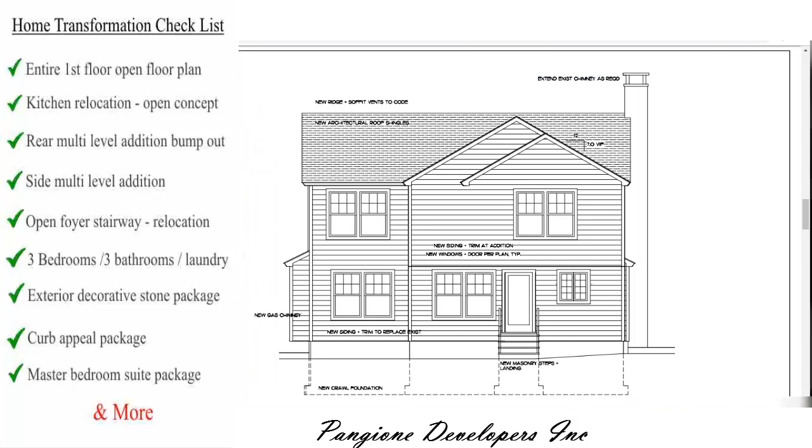Let's go in there and take a look at some of the files that we have here. So again, this is looking down at the survey, provided by the homeowner, and you can see here's the existing house right here, here's the sidewalk.

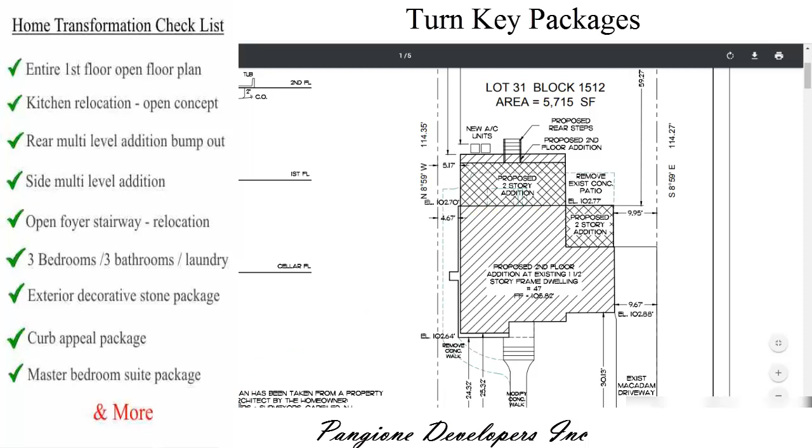So what's happening is this is the existing house, and then we're adding a two-story addition behind the room that's over here, and another addition behind the main portion of the house. And just to give you another idea of what that looks like, here it is right here. We're going above this area right here, and above this whole top floor.

So let's jump back into the files and I'll show you the floor plans. Now here is the second floor plan. You have a bedroom over here, another bedroom, and the third bedroom. This is the master suite. All new windows. You have a laundry up here, and it's going to be a beautiful open staircase.

So you're going to have this left corner here. You'll come in through the front door, which I'll show you on the first floor, and then enter and go up this U-shaped staircase, which leads you up to the top floor hallway. You have your hall bathroom right here, and then the hall takes you into bedroom 1, 2, and then at this area right here is the entry, and this whole section is all master suite.

You have your master bathroom, double sink toilet, and an oversized custom shower. Beautiful master bedroom with a tray ceiling and a very large walk-in closet.

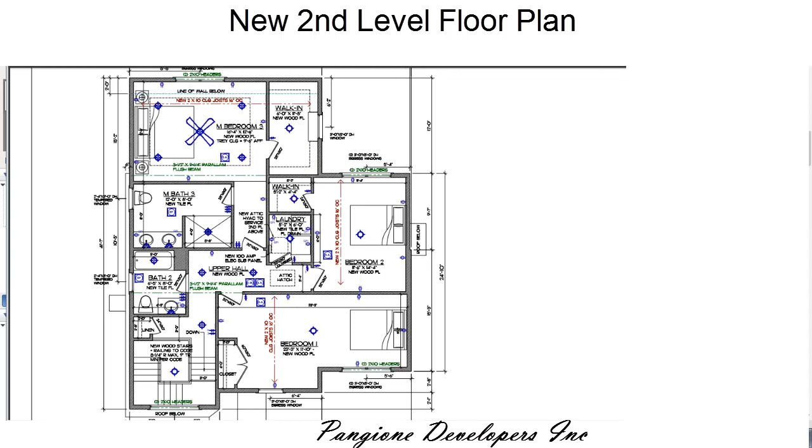Now let's take a look at the first floor, and as you recall, here is the area walking up to the second floor, and here is our first floor. You walk in through the front door. We're going to be changing all these windows. This is the addition over here, this whole back section is an addition.

And then we're going to be stripping down this whole existing area over here. You can see the header marks. We're going to have some structural beams in there that will allow this ceiling to be one level all the way through. It really looks nice. You can see all the recessed lighting that we're going to be installing.

Just to give you a quick walkthrough: as you walk in the front door, it's going to be completely open front to back. Foyer, family room, dining room, kitchen, everything is open. When you come in, you'll see the open foyer leading up to the second floor. We have a coat closet, and past this first archway, on the right is a nice open office with French doors looking in, then the existing bathroom we're remodeling, and then it all opens up to the kitchen. We're going to have an oversized pantry wrapped with countertops, cabinets, and a nice island, and on this side will be the dining area, looking into a completely open family room with a gas fireplace.

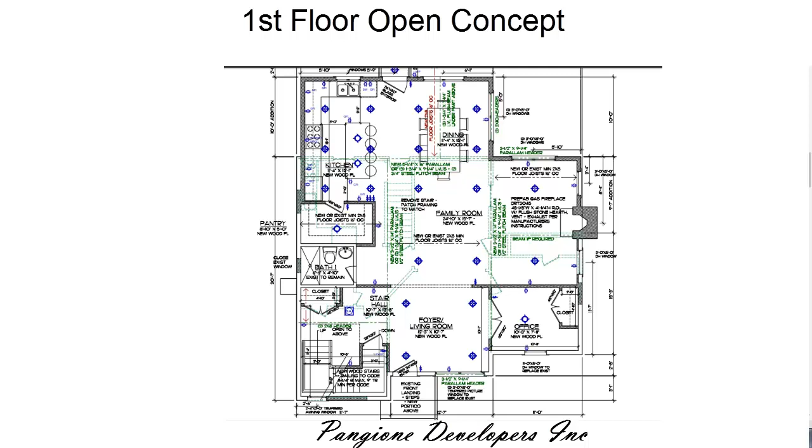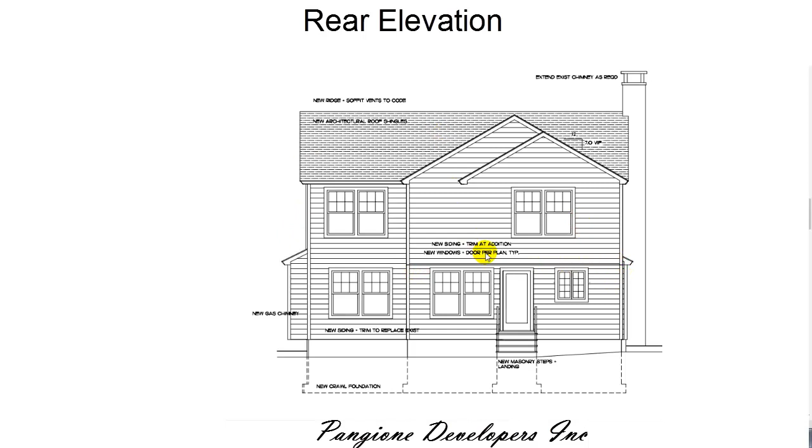Here is the back of the house. Again, all these are 3050 oversized windows. Here's the kitchen window, and this is the complete top floor. We're going to have a cantilever in the back—let me show you that. Here's the cantilever, which extends the master bedroom area. It's just a really nice setup for this young family in need of more space.

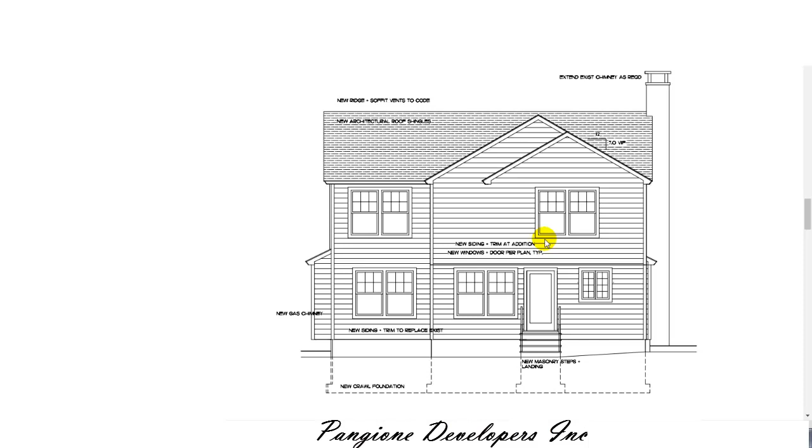You've heard about our program for New Jersey families in need of space, even in cases where they're purchasing a fixer-upper. This particular family has owned this house for a couple of years, but we're going to be fixing it up, transforming it into a beautiful home when it's completed. We're going to be filming this project from beginning to end, starting in about a week or so, and you'll see every phase. It's turnkey—floors finished, painting completed. Just bring your furniture and move right back in.